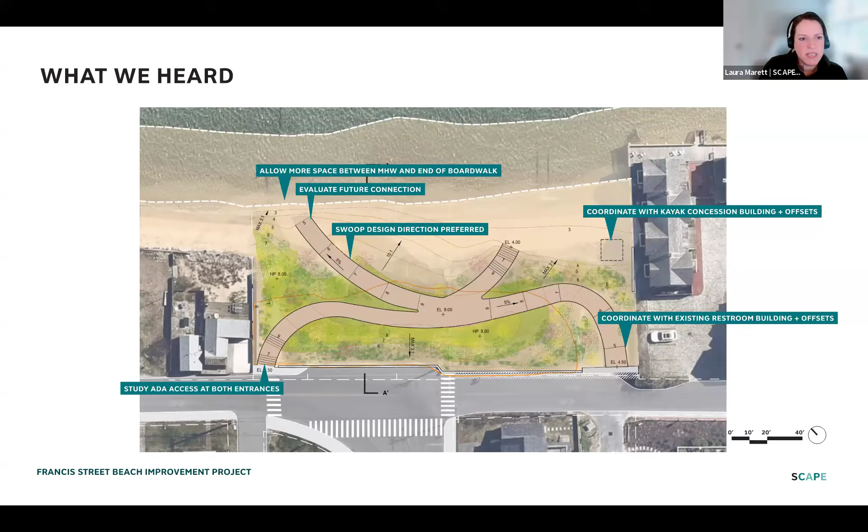If we go to the next slide, maybe I can talk about the design parameters and then I'll hand it over to you, Lena, to talk about where we are with the design.

So these are a lot of the great conversations we've had with the Woods Hole Group team and the PAR team, understanding the constraints, both in terms of grading a dune that's going to not need a lot of maintenance and sustain into the future and perform its resilience goals, and also create something we believe will be as permittable as possible.

So we're trying to minimize some of the redundant access. We had 2 points of access down to the beach before, so we're minimizing that because of permittability discussions. We have a cross section of the dune that is desired with a steeper slope back towards Washington Street, a 15-foot minimum dune crest and approximately a 10-to-1 slope down to the water.

So that's been a given in our design. We're maintaining that clear zone for the kayak concession. We are considering the future extension, as I mentioned, and ensuring that we're not building structure within the dune resource area that's been delineated.

And we're also thinking, and this is something we've really dug into in the last couple of weeks, about how do we connect with the near-term condition at the neighbor's property, and then how do we also enable longer-term connections if desired. And I think that's it, and accessibility. So all of those things are going in - it's kind of like threading the needle to be able to meet all of those different constraints and guidelines.

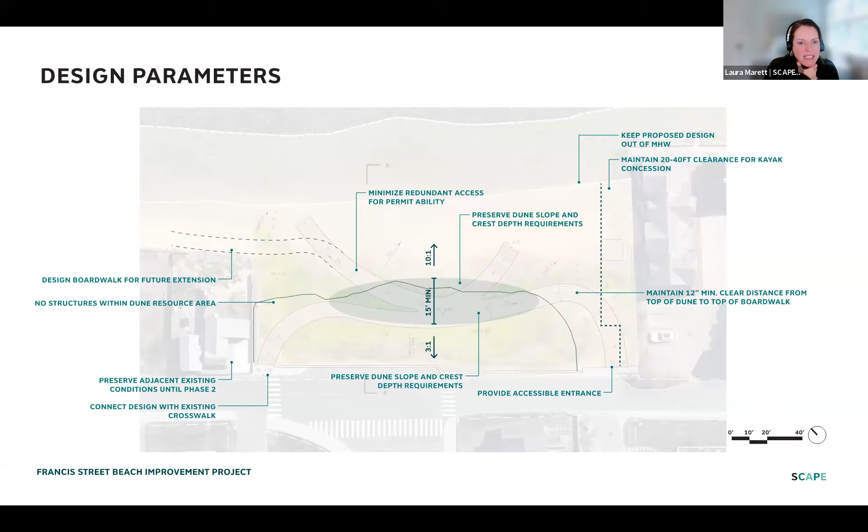So I'll pass it to you, Lena. Maybe you can walk through where we are with the design. Yeah, great. Thanks for kicking us off, Laura. I think definitely in my weeks on this project, it's a small site, but a complicated one.

So where we've landed, you'll see on this plan we've consolidated some of those pathways to streamline this into more one fluid geometry of the boardwalk. As Laura mentioned, there are 2 accesses along Washington Street, the one further on the north, working with that existing sidewalk.

We did have to introduce a stair just given the grading constraints. But you see we've also introduced a sidewalk that you can walk along Washington Street to access that accessible entrance on the more southern side of the site, where we've also introduced a parking spot so you could park there and immediately have access to the beach.

You'll see we've also still preserved that ramp for beach access. There's also now an overlook, which can then be studied to continue on and be a future phase. We've also included some seating there as a place of rest. We're also working with the existing restroom structure and some kayak storage to the south of the site, and working with those dune constraints.

So just to look more specifically at the gradings, this is a lot of what has been informing this design. You can see on the beach side, we've been consistent at a 10-to-1 slope. We do get a little tighter at 7-to-1 as you get more landward. And then on the other side of that dune crest, you're at a 5-to-1 or a 3-to-1.

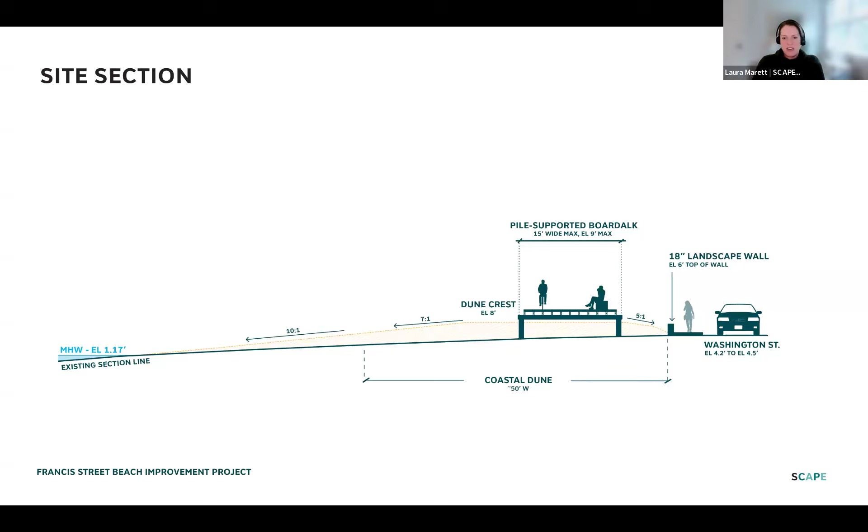So I'd just open it up if any of you want to comment on any aspects of the design we might have missed in describing it.

Can you see me muttering in the background, Laura? I can't see you muttering. You're very tiny, but please tell me what you're muttering.

No, I have a question, just for informational purposes. I forget what the slope requirements are for a coastal bank, and I want to make sure we're within the dune and not triggering regulations for a coastal bank. If we are triggering those regulations, that we've accommodated that. I don't think this is as big a slope, but I want to make sure. Is that something you can comment on, Joe, or if not, we can get back to you?

I can answer that question. Oh perfect, Adrian, thank you. Yeah, no problem, we are working in the dune. There will be no coastal bank triggered on the site, based on the slope. Okay, I couldn't remember what the slope requirements were for defining a bank locally. Thanks.

The slope requirements are when you switch to greater than 4-to-1, and where your floodplain is in regard to that. So we're all under that on the seaward side. Perfect, thank you, that was exactly what I was wondering.

So I'm going to move on to some of the materiality that we've been looking at. We are going to have guardrails in this condition, given that we have to get up to an 8-foot elevation from 4.5 pretty quickly.

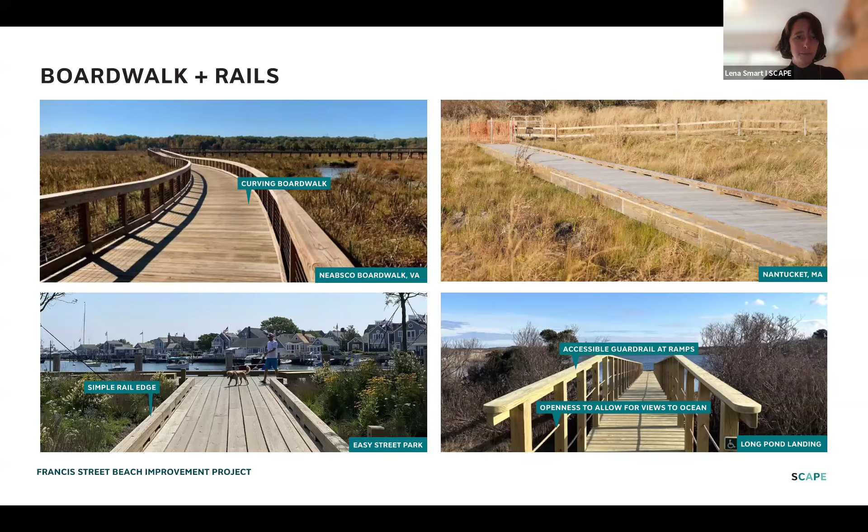Lena, this is Matt. My thoughts are to match Easy Street, the picture you have on the bottom left. With that sort, to me, I don't think it needs to be a handrail or anything. So that's just me.

Did you say you don't think it needs to be a handrail? I don't think it needs to be up at waist height. Oh, I see what you're saying. Yeah, so I think just keep it as a backless bench, as unintrusive as possible. That's legal.

We had to do a handicap ramp at a historic building, and they were trying to make us put a guardrail and handrails and all this. We were able to do it with something like the Easy Street example on the bottom left legally, because the drop wasn't too big. I think that was less intrusive and didn't take away from the building, which it would have. So I think the same thing here - if we can keep it down low so we're not taking away from the beach, we're better off.

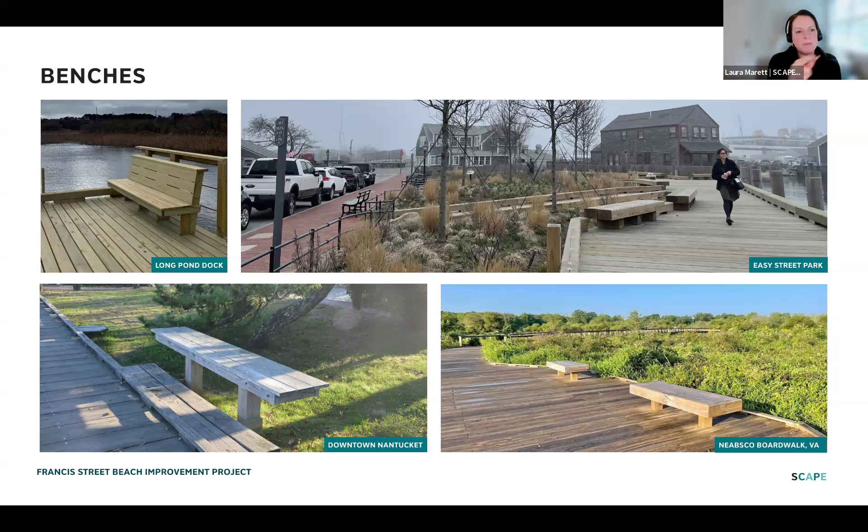I think that's a great point, Matt. I want to show you a detail of this - we're going to be developing a 3D view that will allow you to see how this looks on the ground as a pedestrian. But if you go back to the plan for a second, Lena, we have been trying to do exactly what you're saying, which is to minimize the need for any kind of guardrail across the whole boardwalk. So that means fine-tuning the top of deck to the top of dune so it can't be more than a 12-inch drop. We have achieved that, I believe, consistently.

So that's great. The place we are going to need a rail is going up the ramp and back down to the beach, and that's because we had to do an 8.33% slope in order to get up to where we need to be.

We think there are some really nice examples, like the Long Pond example, where there's a rail that's just a trip stop at the edge of the boardwalk that goes up to a wooden handrail. We think we can do that elegantly, but it's something we're going to continue to study. With the grading constraints, we couldn't do a 5% slope and get up to where we needed to be, which would eliminate the rail requirement.

A thought: if the ramp for beach access is going to be how the concessionaire, the kayak guy, gets his stuff on and off the beach, then you have to think about that. It could be very easy with nothing there, but it may be more difficult if you've got a handrail there. He may not be able to get as many at a time, they might not be able to go up sideways, whatever. So if that's the case, his employees are just going to go over the dune, which we don't want. I think I'd be thinking about how it's going to be used when designing that, and whether we even have to ask for an exemption on that portion, because we know how it's going to be used.

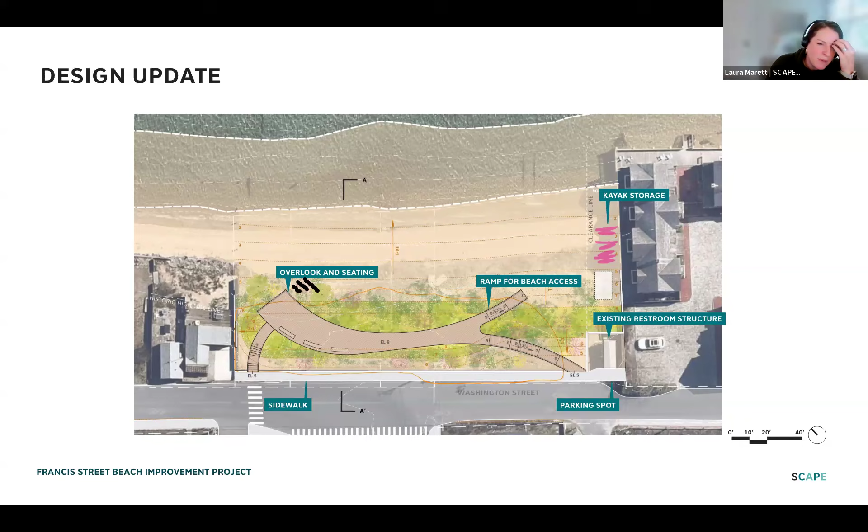Good question. Maybe, Lena, would you mind flipping forward to the grading plan? So based on what we've been working on with Kirk and the Woods Hole Group team, we're looking at a profile that has a steeper slope here. And then we get to, you essentially have to get up that dune slope in a way that's maintainable, and then the dune crest and the boardwalk path can sit on top of it.

So I think what we're looking at as a sort of maxed out condition might be pulled a slight bit back from here, but it could come further back towards the road. And I guess we could think about the geometry of this thing if it wanted to go more this way than that way. I'm not necessarily saying to change it, I'm saying is there the option in the future from this design to swerve it out to the road as well, with a change, not just swerve it in front of the buildings.

Yeah, I think there is, with maybe some tweaks to the geometry. I think the approach we've been taking is we don't want to build anything today that isn't compatible with a range of future possibilities. So yeah, that would be my take.

What do you think, Todd? Yeah, we've been taking the approach that we're not going to dismantle really anything, except maybe some curbing to expand on it, or a seasonal stair, that kind of thing. I think one of the next steps in the process here is really meeting with the abutter for what they're planning to do for any resiliency they're considering, and how they want to see the interaction occur as the neighbor to this, for the near term and for the long term. So I think there's still a little bit of work on that interaction that's important.

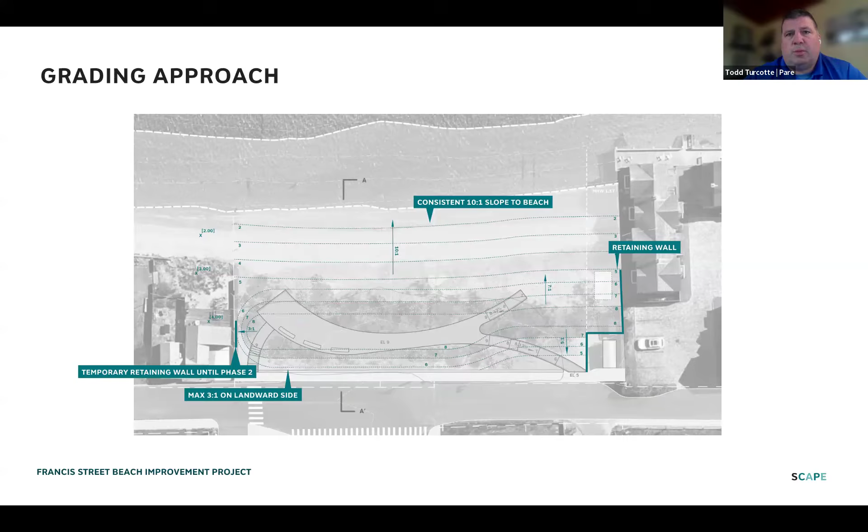And now, do whatever you want, because there's plenty of space. I think what we're proposing is a shared lane, so it's just part of the road, making it easier for bikes to pause, and for walking. That could be part of reconfiguring these crosswalks, if there's ever a plan to do that. That road doesn't need to be there anymore, in my opinion. Sorry if I was getting confused between the two issues.

No, you're fine. I think our main concern, especially since we weren't able to eliminate the stair on this side, was to make sure that if someone using a wheelchair or needing a ramp is coming across this sidewalk, they should have a fine way to get to a ramp. That's a good spot for it. And then you also have the Salt Marsh Center folks who can come right across and use the ramp. So I think we felt like that was a pretty good resolution, but we need to provide some kind of access to get from this crosswalk to the ramp.

There should be two of those. I completely agree with that. And I think the other thought was about both walkers and truck drivers, because right now you don't want a raised curb there. I'm not saying either, but it needs to be resolved so that everybody knows what's going on. It could be paint or a different material, but not a curb.

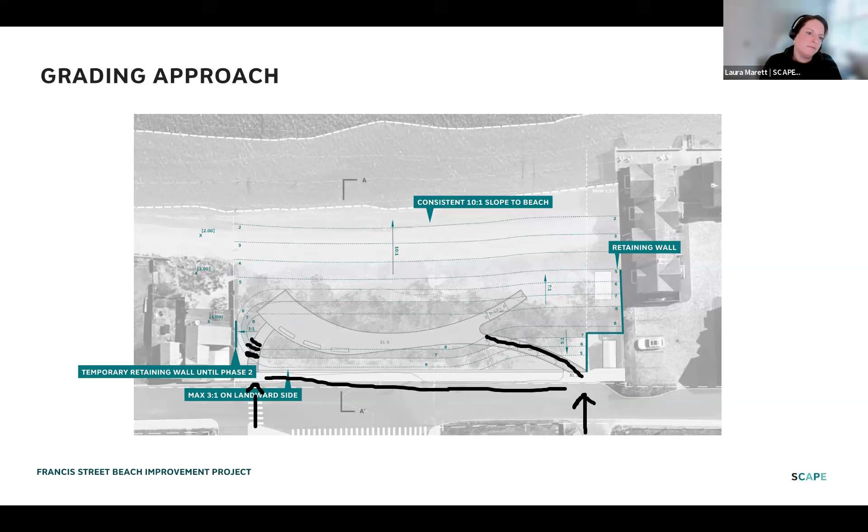You could do a rolled curb or something. We can look at that detail more, I don't need another guy in the street in that spot. But maybe a flush curb, something that defines it. I'm fine with that, to define it, but not a raised curb - so walkers know where to go and truck drivers know where to go.

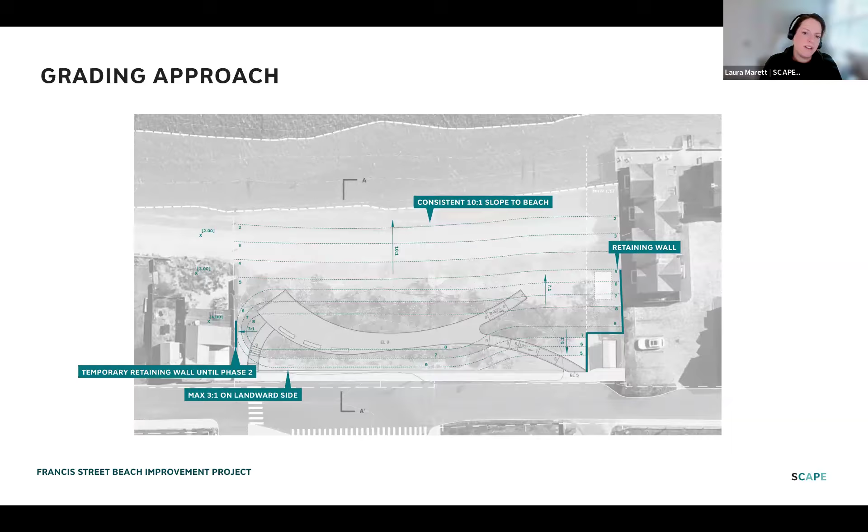And I think too, Laura - I don't need to keep talking - but that intersection, I'm so happy that got done, because there was some pushback, believe it or not. I fixed that. But anyway, it was kind of striped the way it is because they had to hurry up and get it striped.

There's definitely room for improvement there. I'm in favor of some kind of Belgian block, little triangle-y thing, something that looks better, like we did in front of the end of North Water to the hotel, whatever it is now. That one's kind of nice, because it's a big space of pavement. I kind of hate that around here, we should try to do something better.

But at the same time, you don't want tires twisting and breaking the bricks or whatever we end up putting there, you know what I mean? Because when you turn, the tires bite into the ground and pull and push things. So any idea would be good, because right now there's an extra lane sort of in the middle going down, and people - I saw someone.

Nobody knows what to do. I saw - listen, you have to use your left directional to go straight on Nantucket in 3 places, okay? 3 - you figure out what those 3 are and you'll be a winner. There's 2 obvious ones and another one you gotta think of. So in the summertime, people don't know that you gotta use your left directional to go straight.

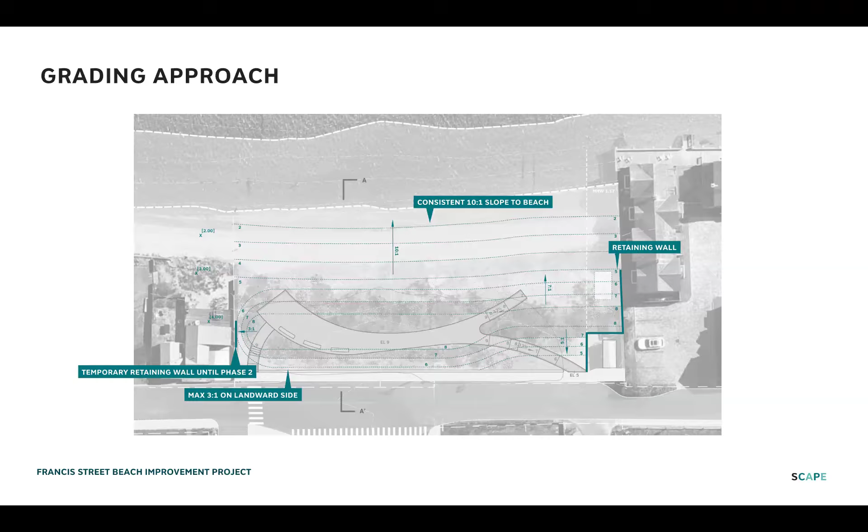So Nat, there's a name for what you're saying, it's called a pedestrian refuge. That is severely lacking in that intersection, so I'm glad you brought it up. Don't encourage him, Chuck. Nat and I don't agree very often, but yes, this is a time.

Love it, all right. This is the time to kind of incorporate some of these improvements into this, even though it's out of the scope of this project. I think it's good.

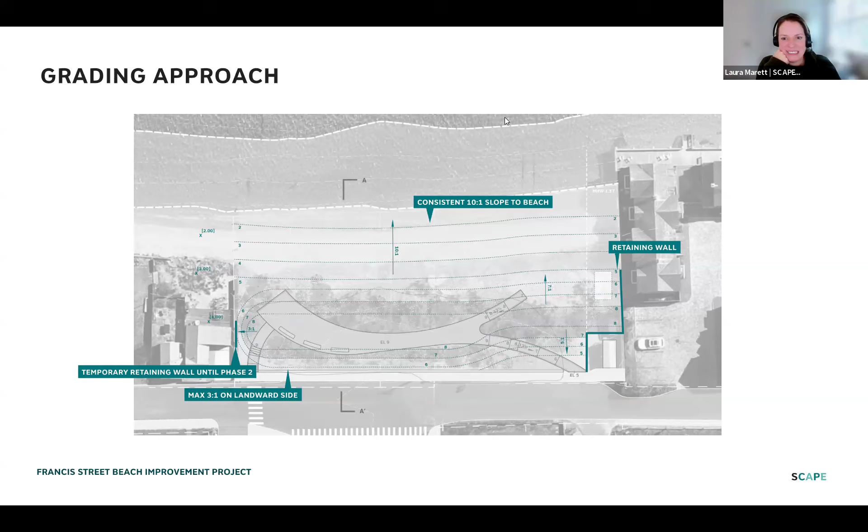Should we talk about permitting? Any last design comments before we pivot? That's where everything falls apart. Sure, let's talk about permitting. Thank you, Laura. No problem.

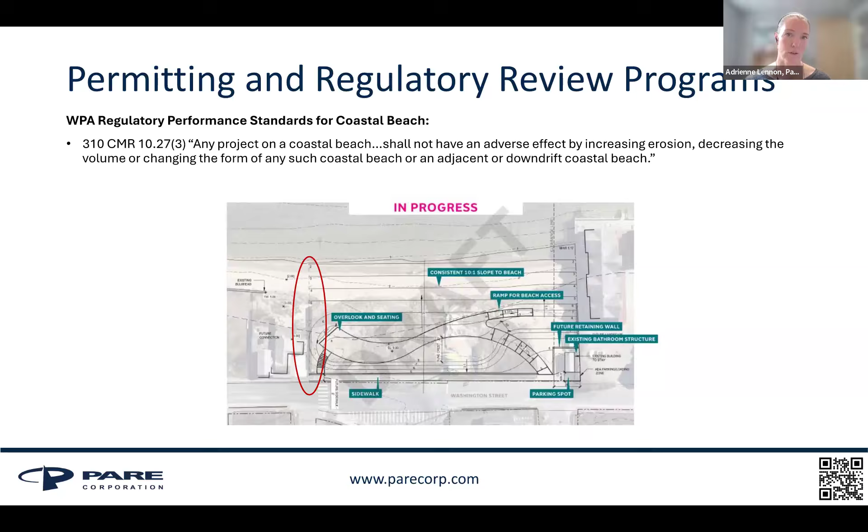It's a lot more linear because we're anticipating the beach to reestablish itself over time by redistributing the sediment according to the tide cycle. So we anticipate it to be fairly parallel to the existing high tide line. This is such a small site that we don't think too much sediment will move around, and it's also not a terribly high velocity, high tide storm surge kind of scenario, except in the case of larger storms. So that's one piece. We're still looking at that and it continues to evolve, but we talked about this already in your questions. This is the regulatory performance standard and the statutes, and generally how they're observed by DEP and the Office of Coastal Zone Management, helping us make a plan for regrading the dune back down to the beach so it isn't going to eventually be a lateral movement up into the abutter's property.